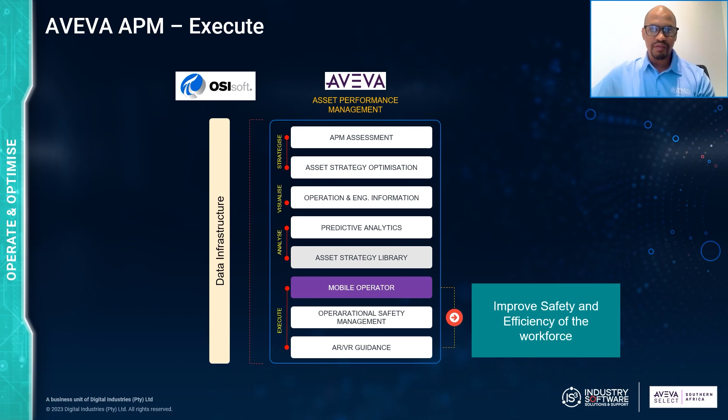In this full APM picture, AVEVA Connect's cloud portal is the fast track that will boost our solution delivery to customer targets. Now let's zoom into AVEVA's mobile operator rounds, looking at the execute pillar of AVEVA's asset performance management, and see how it will improve safety and efficiency of your workforce.

You might ask, why digitize your work procedures? The first issue we meet is what we call the LPF syndrome. Paperwork is collected from your field workers. It's often lost. If it is not lost, it will be piled in a corner or on someone's desk. And if it's not sitting on somebody's desk, it might be occasionally filed.

The second issue we come across is that of compliance. Many preventative maintenance procedures exist outside of your CMMS systems and provide no real-time visibility across your organization. We are expected to ensure regulatory inspections are scheduled and executed appropriately, and that we can provide an audit trail and reporting on these regulatory requirements, hopefully leading to an awareness of any developing issues. Without this, we are limiting our awareness to possible health and safety incidents.

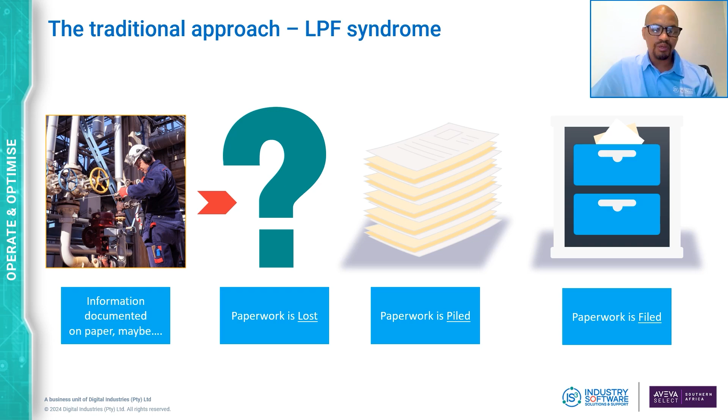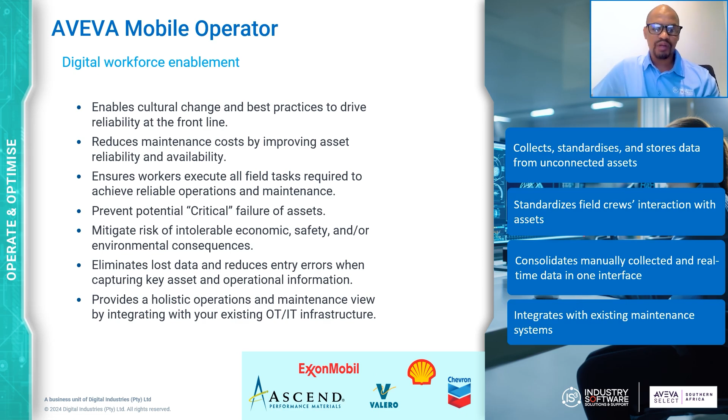Mobile Operator helps companies enable that cultural change and those best practices that drive reliability on the front line for maintenance teams. It helps improve plant reliability, safety, and profitability, and helps companies maximize their return on asset investment. It ensures that workers execute all field tasks required to achieve reliable operations and maintenance across all the company's locations, shifts, and employees, so you can obtain uniformity in work execution. It's a step companies can take to help prevent catastrophic critical asset failure.

When we think about the solution from an operator's perspective, and all the information they need to have in their heads or written down on paper to perform the multitude of maintenance tasks needed to keep the lines up and running, it's quite a lot of information. Isn't it much easier to store that information digitally and deliver it to operators as needed in real time? Not to mention keeping up with procedural changes across several different plant locations.

To give you some idea of how impactful a mobile operator round solution can be, our customers have seen significant improvement in their operations from the solution: asset uptime and availability between 10 to 30%, reduced maintenance costs as high as 30%, and increased workforce productivity between 20 and 30%. Importantly, the visibility of regulatory compliance is sustainably improved as well, and of course it's a great platform for data collection and sharing to empower those IoT applications everybody's talking about. Our customers typically see a payback between the first 12 to 6 months when implementing the solution.

The solution provides an integrated operator workflow return on investment. Industries have seen the following improvements in their workforce when performing integrated operator workflows.

Capture of non-instrumented data through your most intelligent sensors. Your people improve your equipment availability and asset reliability as well. They've also seen the consistent execution of best practices by a mobile workforce. The reduction in production downtime also improved equipment asset reliability, and also the on-the-job training innovation that insulates plants from sudden loss of knowledge.

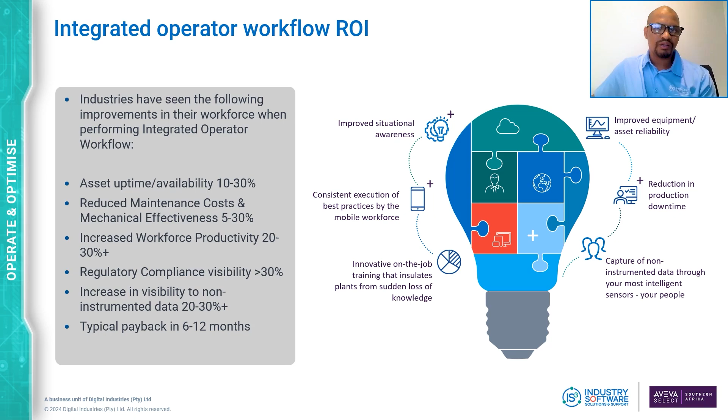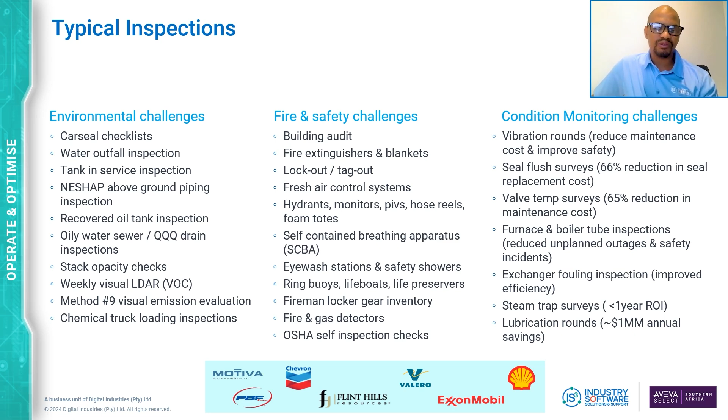Looking at some examples of typical inspections, but not limited to the following, that address some of these challenges faced in different industries. Looking at environmental challenges, we have recovered oil tank inspections, water outfall inspections. Looking at fire and safety challenges: building audits, fire extinguishers and blankets, and lockout-tagout procedures. Looking at condition monitoring challenges: vibration rounds, to reduce maintenance cost and improve safety. Also seal flush surveys, which led to a 66% reduction in seal replacement cost when continuing those checks. Also valve temperature surveys, which can also result in cost reduction in maintenance.

Looking at logistical challenges: truck loading and unloading, rail car loading and unloading, tanker loading and unloading. Then looking at turnarounds: safety audits, work permit audits, ensuring the right work permits are in place. Route inspections, work order execution that can be linked to an EAM system, and importantly, scaffold inspections as well.

Just to give you some examples of the typical inspections that have been built with our solution, but it's not limited to the ones I've just shown.

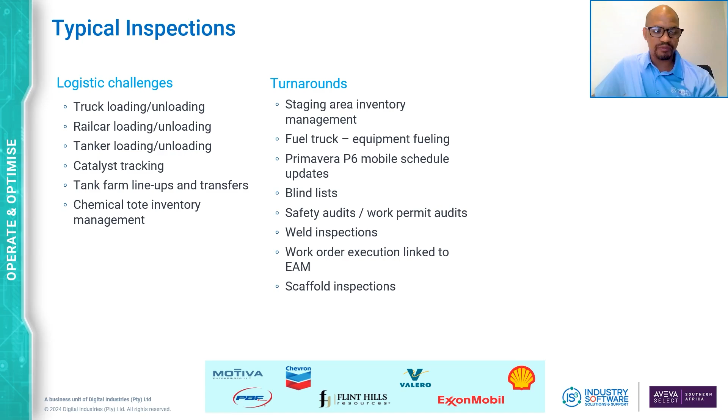Now we're going to zoom into the key features. We now understand what the system can do. Now we're going to look at what and how it actually does what I just explained.

To support audit functionality, Mobile Operator is a combination of hardware and software solution. It leverages ruggedized and consumer-grade mobile devices with a suite of software for building procedures, managing scheduling, auditing your work processes and procedures, also building configurable reports to deploy to key stakeholders via email or download, and finally the mobile execution of your procedures.

Let's take a look at some of the application components within Mobile Operator. First, the Schedule Manager application replaces the old scheduling function previously located within Procedure Builder with a calendar-based interface for workload balancing capability. We also have a new Crew Setup application that allows sites to create a rotating shift schedule component within the solution, matching the currently deployed schedule. This functionality allows you to schedule procedures based on a crew instead of just a particular shift.

We also have the Auditor Plus application, which combines the capabilities of the previous Procedure Monitor and Procedure Auditor applications into an easy-to-use single interface. This new scheduling capability supports the application, and new management-type reports are also available. The Mobile Operator user interface is largely unchanged, but new capabilities have been added to access procedures on demand, as well as enhanced synchronization, resulting in an improved user experience.

Adding mobile computing technology to the operator's work process, routine equipment inspections and process data collection become opportunities to recognize early symptoms of failure and take actions ranging from immediate operator tasks to work order requests.

Let's focus on the Procedure Builder. The toolbox holds everything needed to create procedures, and users can easily drag and drop the components into the designer area. The procedure items are groups where asset assignment is done. Decision tasks and conditions can also be set up. There are 4 items, and these 4 items are standard with any installation of Mobile Operator rounds.

Configurations to send field-collected data points to an external system are also easily dragged and dropped into the task. Typical integrations are process historians, but this could apply to any external systems as well.

Integrations are extensively extendable and can be added by partner system integrators or customers. If the data will be captured by any external peripheral device, that designation is done here as well in the procedure builder, as well as the user will sometimes designate the type of reading the device will provide.

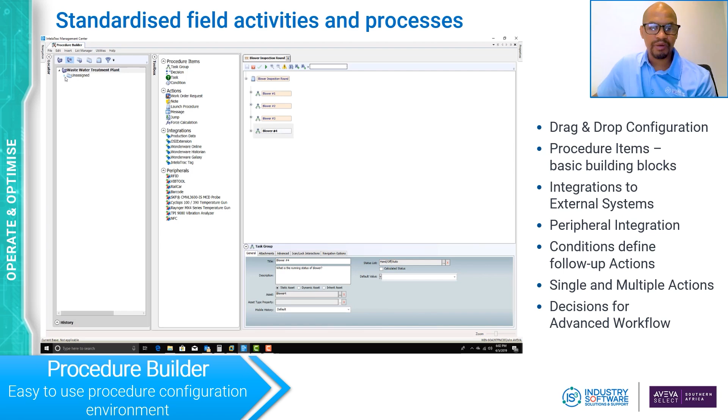Conditions are added to the task where trigger values are defined. Multiple and unlimited conditions may be configured for a single task, and specific actions for specific workflow steps can also be added, including additional tasks that the user can configure, based on those conditions. Actions are extensible and can be added by the partner as well.

The Schedule Manager provides the ability to schedule procedures. You can also review the status of your procedures, past or future, and review detailed statistics on each procedure instance, all via the same user interface.

The Schedule Manager effectively replaces and enhances the schedule and the role assignment previously located in the procedure builder. It also allows for the suspension of schedules for shutdowns or turnarounds.

Users with permissions can schedule and easily drag and drop procedures into the calendar to begin the scheduling process. Existing procedures can be scheduled or edited in the same way. You can assign procedures to a specific role and specific dates, fully customizable within the solution. You can also see at the bottom of your screen the statistics of each procedure.

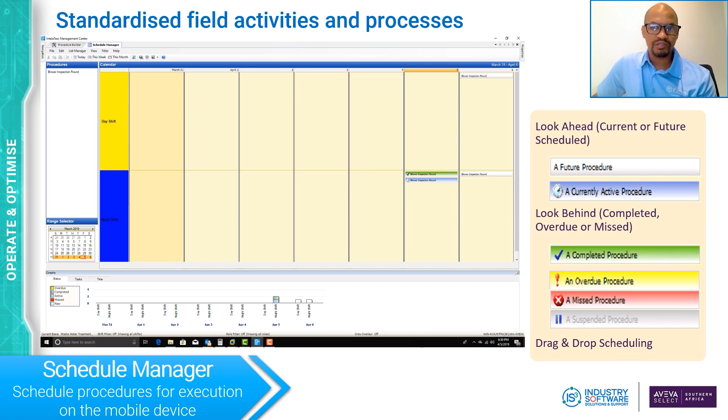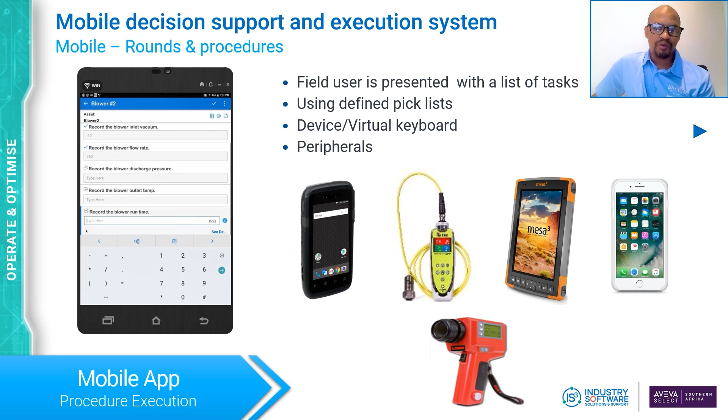So you can see I have an inspection for a blower, and this allows the user, the inspector, the operator, to actually go into the field and execute the procedure, then save those values back to the mobile operator server and sync those values, which you can later review.

Also available in the mobile application, you are able to view the different tasks and see the history of your different values for a specific task. You can also pan and zoom in the mobile app, giving you a rich user experience with the mobile device.

You're also able to add notes, free text notes, and logbooks to your procedure. This is above and beyond a required note that you've configured in your procedure. So you can add notes, and they will then be available as a log entry.

You can also trigger mandatory notes to be added in your procedure, so if an operator needs to give feedback based on a condition you have configured, that's also enabled in the solution.

In your procedure, you can also create condition-based analysis that's immediately available in the field. Based on the input the operator provides, you can create condition-based steps or logic in the solution. So you can set up your task, and if the operator enters a high oil temperature between 180 and 200, you can then kick off another check or another procedure within the one procedure. This is all enabled within the solution.

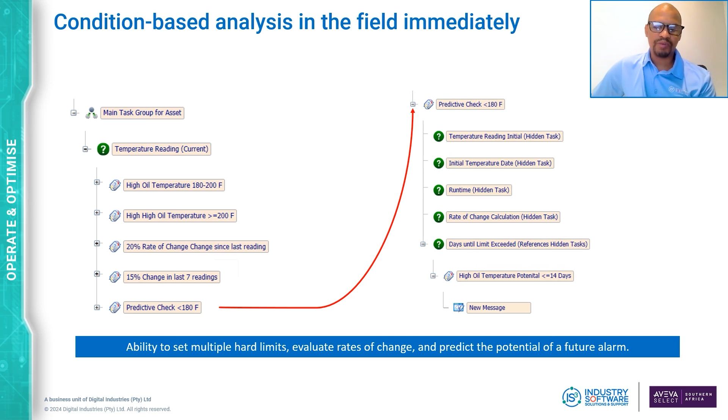For enhanced situational awareness, you can also configure dynamic limits. Variables can come from operator input or from third-party systems, so this is where you can link and integrate with your historian system or any other third-party solution, giving you an enhanced experience in terms of situational awareness.

So if your fuel header pressure is greater than 1,200 psig, you can have that check condition set up. If it's greater than that value, you can do this check. If it's lower than that value, you can do a different check.

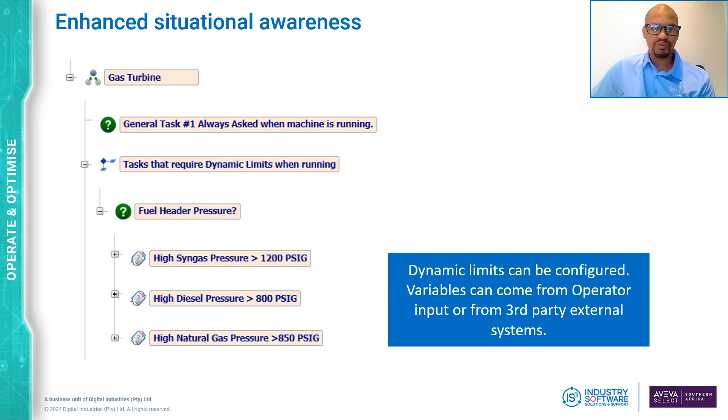So this is all customizable in the solution in terms of your workflow that you want to set up, looking at your enhanced situational awareness, and the actions and steps required.

So you can say that if the oil temperature is above 180 degrees, the expected conditions are normally between 150 and 160 degrees. So you check to make sure that the heater is off, and check the LO cooler is proper operations.

So then the operator has to make sure they check those checks, and then based on the response, you can do a condition. So the message text can be calculated or it can be delivered from the external system at a runtime.

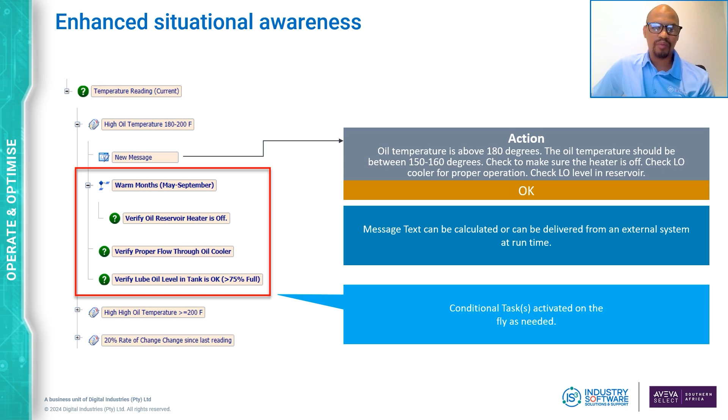So as you are doing the checks, you'll get immediate responses based on the conditions that you've set up within the solution. So conditional tasks are activated on the fly as needed. If the conditions are met, additional tasks can be activated or can be bypassed based on the status of your check or your task.

You can also dynamically launch another procedure, or you can then trigger a work order request. So there are triggers available that you can use within the solution to enhance your situational awareness and give feedback or run this configuration at a runtime.

So as the operator is doing his checks based on his inputs, the logic you have configured in your procedure will then be kicked off, and these additional steps will then take place. So you can also view existing work requests if needed, or you can create new work order requests.

Once the operator has finished the procedure, the execution on the mobile device, they can then transfer those values or checks to the mobile operator server. So normally, if the operator is in the field and has no network connectivity, once they have connectivity, they can do a transfer from the mobile device that will sync the information to the server.

So after the execution, the Auditor Plus allows users to browse the information collected and provide a final approval on that procedure. The super users would normally approve the values that have been stored on that procedure.

So once a procedure has been approved by using Auditor Plus, the information is then available by reports. The reports leverage SQL reporting services. This allows mobile operator to configure, allow the users to configure custom reports, and also download the reports and schedule emailing as well with the solution.

Now let's look at the reduced cost of ownership. So let's say you have a multi-site deployment of the solution. How does the new release assist you in the cost of ownership? Let's look at how this has been improved in the new release of the software.

With the release of the 2022 version, this allows you to do a single deployment that can handle multiple time zones, multiple cultural settings, and also languages as well. They've also added some additional languages to the language pack, which allows the users to natively view or run the procedures in their own language.

This also reduces the cost of planning and drastically reduces the time for upgrades. All plant locations can be upgraded at once from a single instance, reducing infrastructure requirements since only one database and one sync server are required.

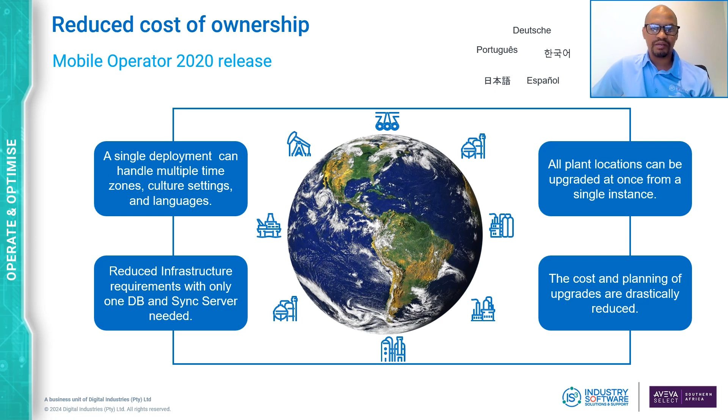So no more having to upgrade or manage your sites on the site level, but you can manage them on enterprise level. Geographically, you can have multiple sites, different time zones, multiple languages, all managed from one single location, hosting a single deployment that handles all the different settings.

You can also do enterprise reporting, allowing sites to compare against each other to identify areas of improvement and gain better standardization or insights. You can also reduce the cost of ownership, in terms of many SQL servers versus a single one, and many sync servers versus a few.

This allows you to do a top-down push of standards, and collaboration between different sites is made easier.

So just to show you what this looks like on the mobile operator app. If you have configured a multi-site or multi-organizations configuration, once you log into the mobile operator or the management center app, you will have an option to select your organization.

Then you can also select the plant that you want to log into, which gives you access to the bases configured for those plants. Depending on how you've configured your access, we still follow the same rules and roles that you would normally use for a single plant configuration.

So once you've set up your organizations and your sites, when you log in with your mobile application or the management center, you can select the appropriate site and organization that you require. This allows you to centrally manage your whole solution or deployment.

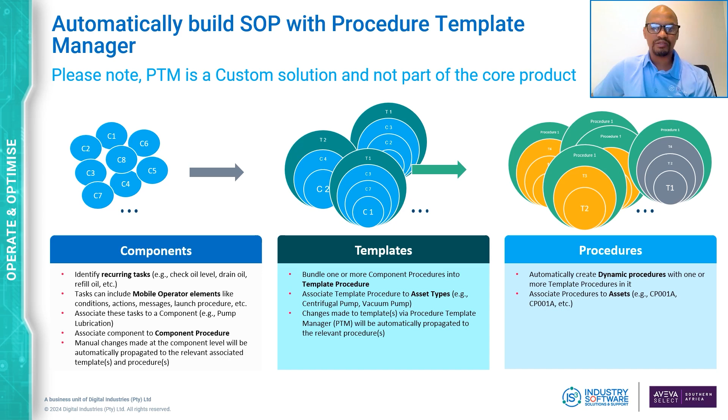But as I said, this is a paid-for service and does not come standard with the standard solution. You can reach out to your local distributor or AVEVA to assist you in how you can get this solution. With PTM, this is looking at the dynamic procedure builder, so you can use a custom extension to build your procedures at scale.

So if you want to do fast deployment on multiple sites, you can use PTM to do that. You populate the Excel template with your procedure definitions.

You then read the populated Excel templates to create those procedures in the mobile operator, and you can create them in bulk. It's a one-time custom exercise which necessitates close collaboration with the SOP owner, and this is a once-off activity normally done during the implementation of PTM.